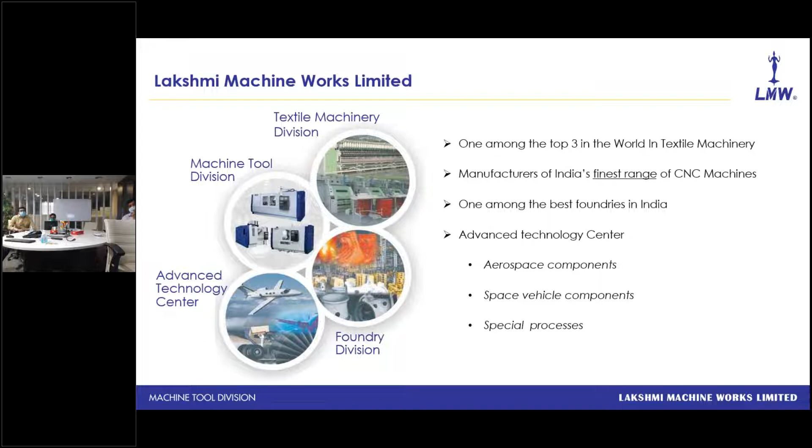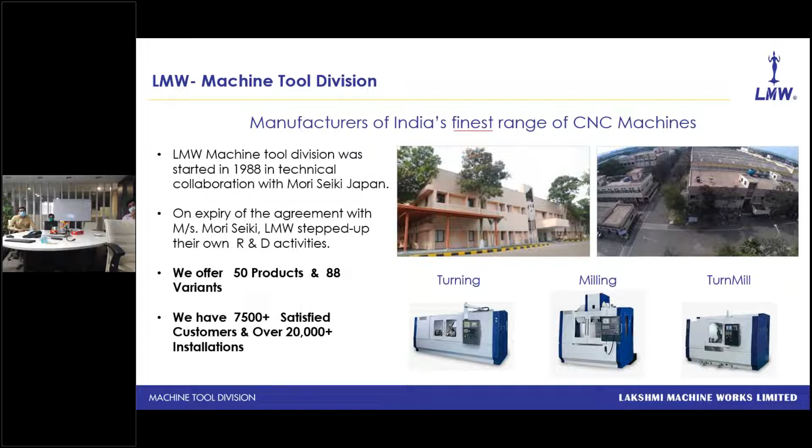We started our machine tool division in 1988 in technical collaboration with Mori Seiki of Japan. The entire plant was set up as per their standards. We stepped up our own R&D activities after expiry of the agreement, and now we offer a wide range of 50 products with 88 variants to cater to almost every segment of the manufacturing industry. Here you can see over 20,000 machines are running day and night at 7,500 plus customers across the country.

We are trusted by the best in the world, DMG Mori. They selected us to manufacture their highly popular model, CMX 600 V1, and since October 2019, CMX 600 V1 is manufactured by us at our factory in Coimbatore.

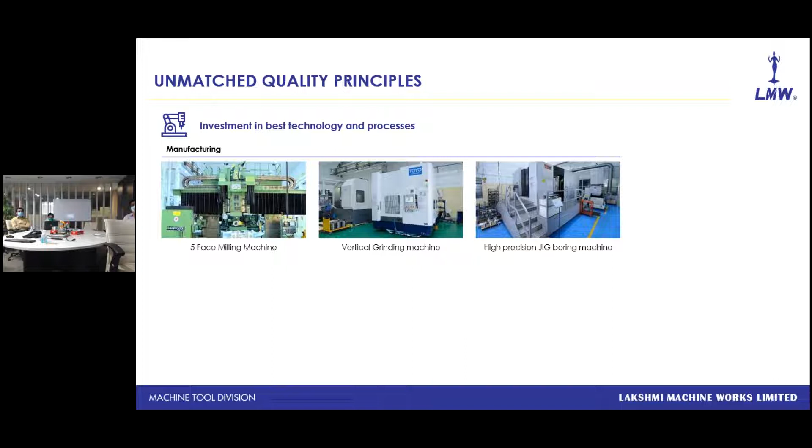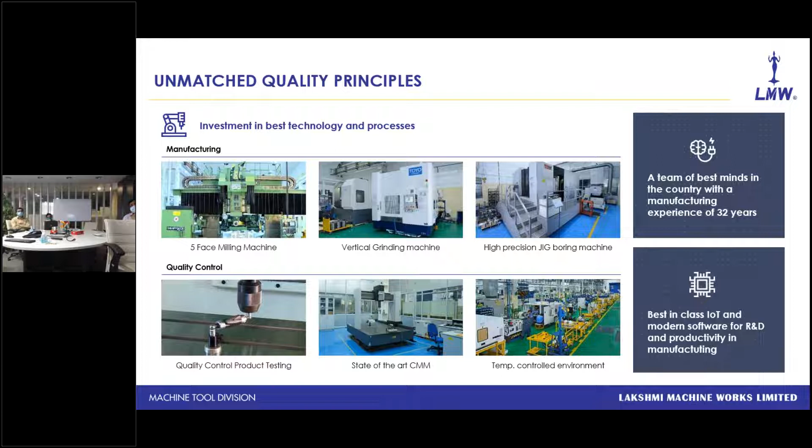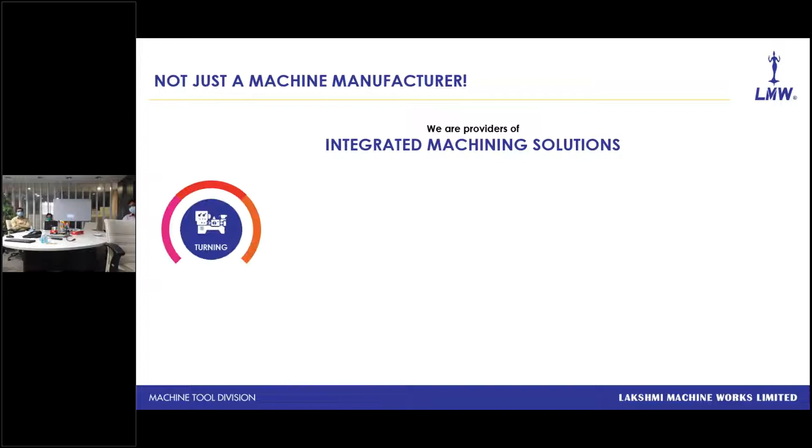We are not just machine tool builders, but complete solution providers. We offer 3 categories of machines: turning machines, milling machines, and turn mill centers with customized tooled-up solutions. We have a highly experienced team in application engineering who has developed thousands of tooled-up solutions.

We also supply machines with complete automation, with robos as well as with gantries to suit your manufacturing setup. And we provide turnkey solutions wherein we conduct CPCP case studies at your work, establish the process and cost per piece. This is supported by our CAD/CAM facilities in our R&D and application engineering.

We also offer IoT solutions in line with current trends in manufacturing. We have digitalized our service department for immediate response to any of your needs on the machine, and thus we are here to provide you the total solution.

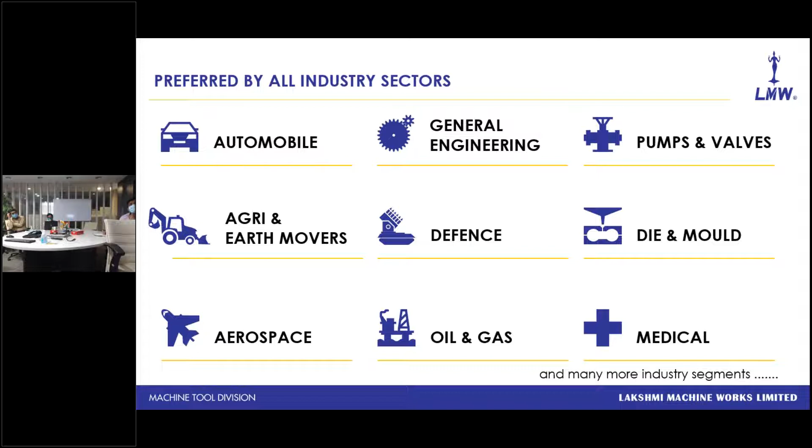We cater to almost every sector, be it automobiles, pumps and valves, aerospace, medical. But apart from this, premier educational institutes like IITs have also chosen our machines to train the sharpest minds in this country.

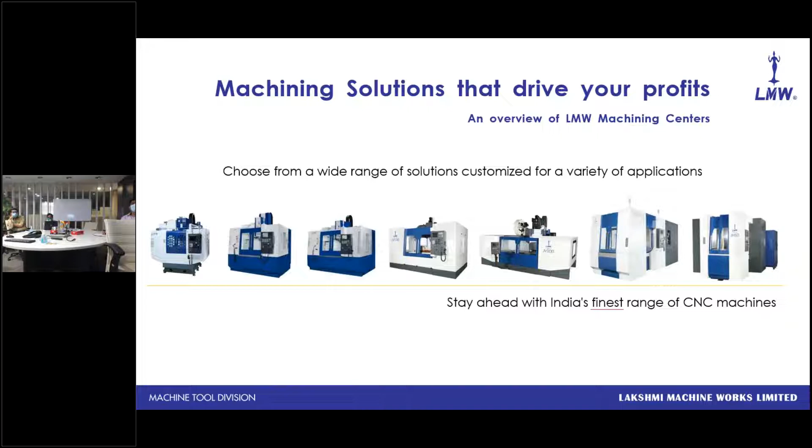We offer the finest and wide range of machining centers with customized solutions to cater to your every requirement and to put you ahead of the competition.

In this slide, you can see various dies and molds made on our VMCs. You can see the shoe mold, the bottle mold, and see the last one, that is a die made for the ornament industries.

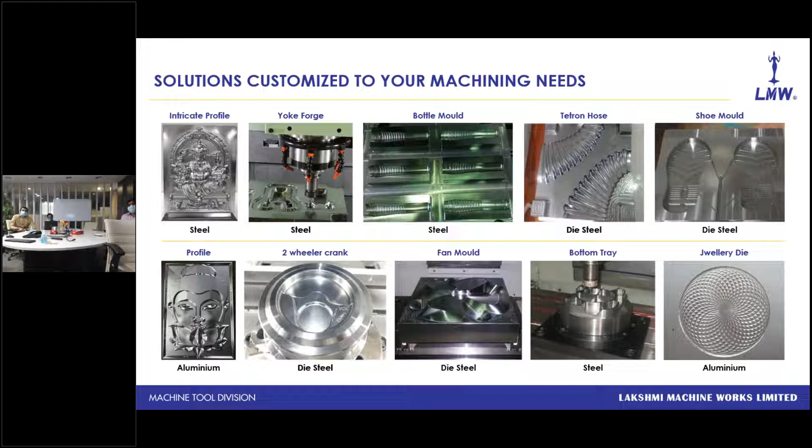You can see the intricacies of profile machining, and all these components are made on our standard VMCs. Here are a few more tooled-up solutions on this slide.

Our CNC lathes are known for their high accuracy, high repeatability, and trouble-free turrets. And we do complete machining of our turrets on our JV100.

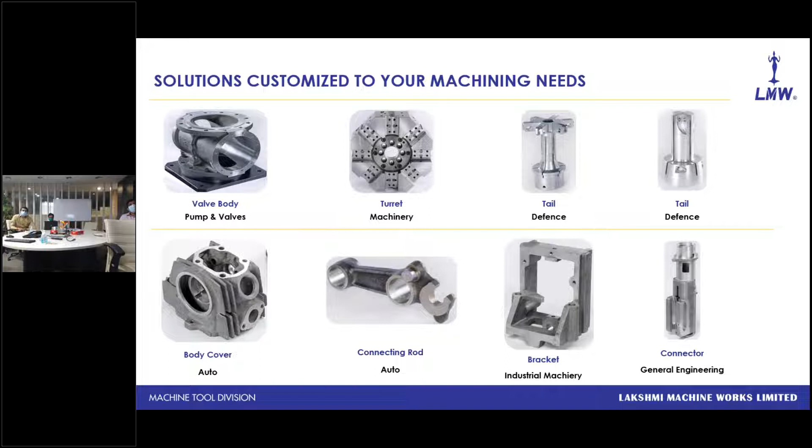See, we all are in business to make money. Now, in order to grow in any business, we need to make decent profits year on year. Now, how to make profit year on year when the costs are going up? Of course, by increasing the productivity.

Now, to achieve higher productivity on machining centers, we should aim for higher surface finish, higher precision, that is nothing but high accuracy, high uptime, and high MRR, that is the material removal rate. So these are the parameters which decide the productivity or ROI of any machine.

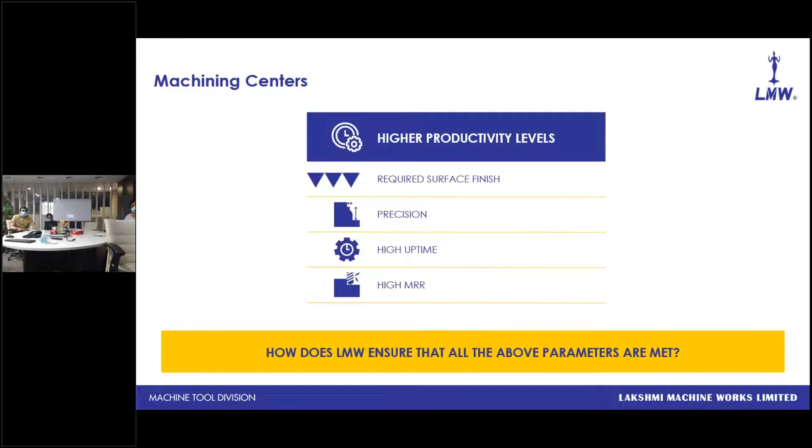And now the next few slides will show you how LMW ensures all these parameters are met on our machining centers. So we will start with the surface finish.

So what are the factors which decide the surface finish? First is the machine itself. Now, when we say machine, it is the rigidity of the machine which decides the surface finish. Second is the spindle. Now, this is the most important part of the machines, and we will be discussing it in much detail in later slides.

Rigidity plays a major role in achieving the surface finish, and it can be classified into two categories, both equally important: static and dynamic.

Now, static rigidity is nothing but the machine structure or castings like bed, saddle, table on which we assemble all other parts. Castings on our machines are of FG300 grade. Now, castings of this grade have properties like high vibration dampening, high tensile strength, and high corrosion and heat resistance.

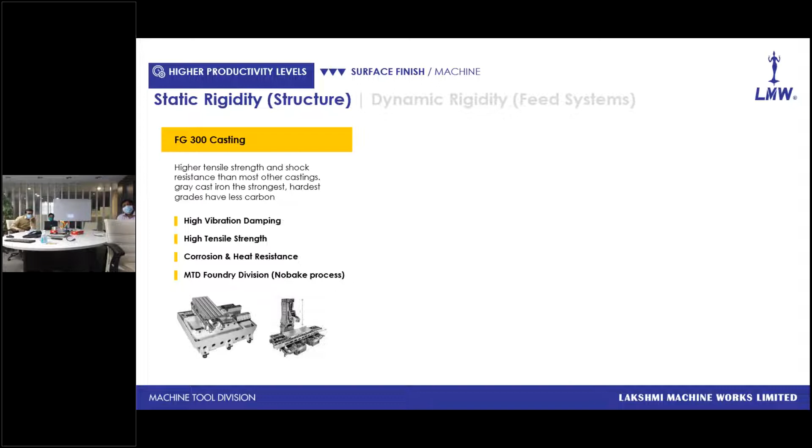All these castings are sourced from our own foundry division. Hence, we have complete control over the process. So you are assured of the best casting quality on our machines.

Our every model undergoes finite element analysis, or FEA. This is an advanced software which analyzes the machine structure and stability at the design stage itself. It simulates the dynamic condition and predicts stress accumulation or casting failure, and accordingly we can add or remove material or provide extra ribbing wherever required. With this software, we can predict the exact behavior of the machine at the design stage.

It is a very wrong perception that only the weight of the machine decides the rigidity. In fact, the casting quality and use of modern software like FEA decide the machine rigidity and its performance.

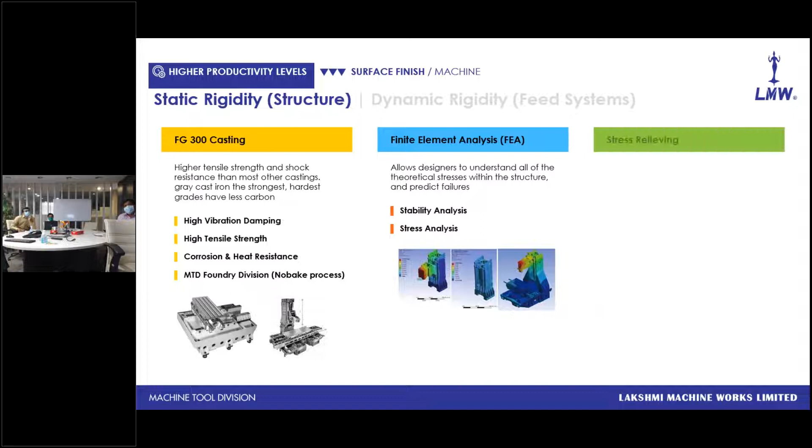Stress relieving also plays a major role in machine rigidity. We all know the natural seasoning process where castings were kept outside exposed to sun for months, but this is an old process. We have modern ovens where we simulate and accelerate the process of stress relieving and achieve the same results in a short period of time. With all this, what we achieve is high rigidity and high machine life.

Next comes the dynamic rigidity. It is the rigidity of various elements in motion, that is, the axis system consisting of ball screws and LM guides.

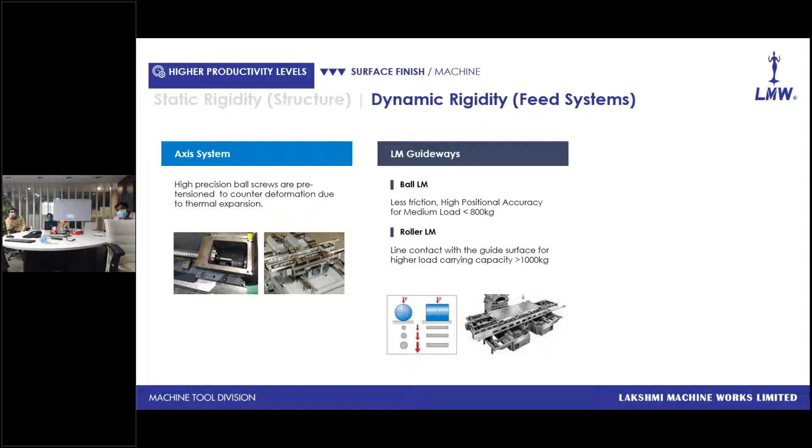We offer you the best class of ball screws. These are pre-tensioned during the assembly to counter any deformation due to thermal expansion. We offer both LM ball as well as LM roller guideways depending on your application. Ball type guideways are suitable up to 800 kgs, whereas LM roller guideways have high load carrying capacity, and that's why they are used in bigger machines where load carrying capacity is over 1 ton.

Spindle plays a major role in achieving the surface finish and productivity, and we'll go in detail in the next few slides. We offer you 3 types of spindles depending on the application.

First is the belt-driven spindle. Belt-driven spindles are used when the material removal is high and the spindle RPM required is less than 8,000. There is a set of pulleys, and the pulley ratio magnifies the torque on the spindle, which is a must for bigger diameter cutters for high material removal at lower RPMs.

Then we have the direct driven spindle. Here the spindle motor is directly coupled with the spindle. You get high RPMs up to 12,000 in this combination, but the torque available on the spindle is less than the belt-driven spindle.

In case your application calls for higher RPM, say 12,000 and above, we offer you the integral spindle. Here the spindle and motor are one unit. The spindle shaft is the rotor and the casing is the stator. Spindle runouts are very less in this case, so you get much higher accuracies and surface finish on the component.

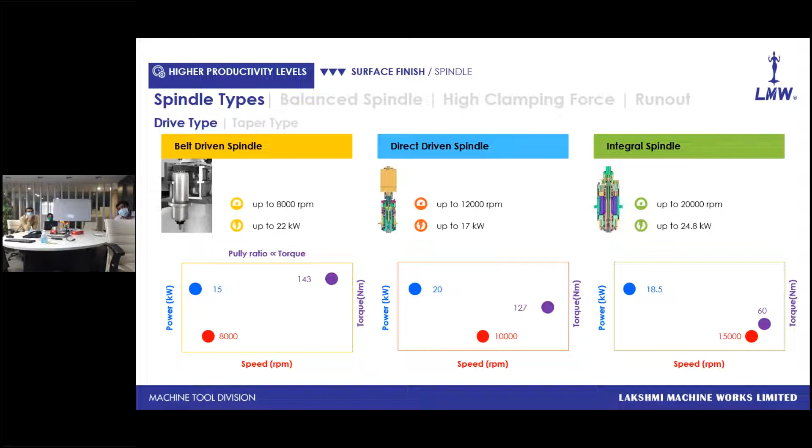We offer 3 types of spindle tapers or tool locking mechanisms. The most common is the BT standard. You must be having BT 40, 30, 50 holders with you. Here the tool holder gets clamped against the spindle taper. We offer this type of clamping system when your application needs less than 8,000 RPM.

As the spindle RPM increases above 10,000, centrifugal forces acting on these tool holders also increase. Hence, the tool locking mechanism needs to be strengthened. In such case, we offer the BBT type spindle. Here the holder gets clamped on the taper as well as on the face, and that makes the locking rigid and ideal at higher RPM, so you're able to achieve higher surface finish and better runout.

Now, in case your application calls for RPM of 18,000 and above, we offer you the HSK type spindle. Here again the tool holder is clamped on the taper as well as on the face, but the clamping is from inside out. So at higher RPM, centrifugal forces actually assist in perfect locking of the holder. This type of spindle is offered when you require very high RPMs, high accuracies, and surface finish.

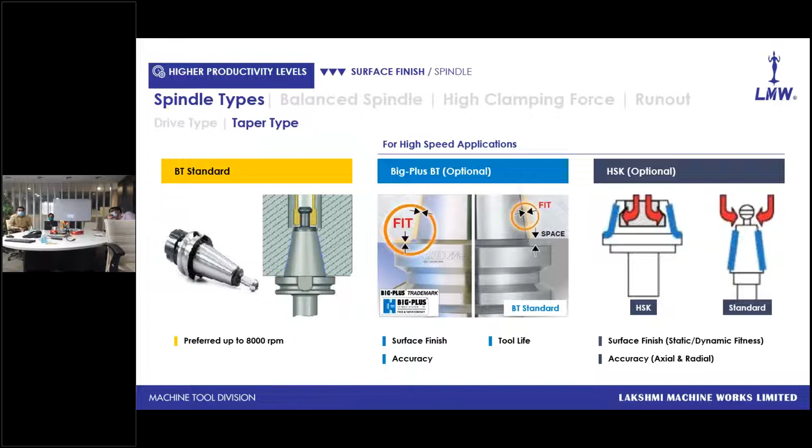Now, the next requirement for getting surface finish is the balanced spindle. You will all agree that balancing of any rotating part is a must for trouble-free performance and life. It is applicable right from your car wheels to the machine spindle.

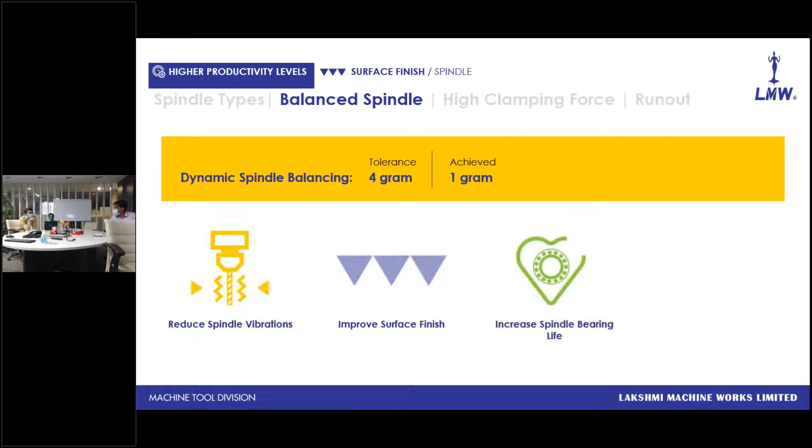As per the JIS, that is the Japanese standard which we follow, the tolerance for spindle balancing is 4 grams. We take extra care and maintain it within 1/4 of that value, that is 1 gram. So what you get in return: reduced spindle vibrations, improved surface finish on components, high spindle life, high tool life, and ultimately high productivity on our machining centers.

Tool clamping force is also one of the major factors which decides the surface finish. For BT40 spindles, ideally it should be between 8 to 9 kilonewton. We maintain it exactly at the mean value of 8.5 kilonewton.

Generally tool clamping force is measured in the static condition. But when the spindle is running at higher RPMs, net clamping force gets reduced because of the centrifugal forces. So how can we ensure that 8.5 kilonewton of net clamping force is available during cutting? That's the reason we measure tool clamping force in dynamic condition with a very special instrument, just to ensure that 8.5 kilonewton of clamping force is always available during cutting conditions.

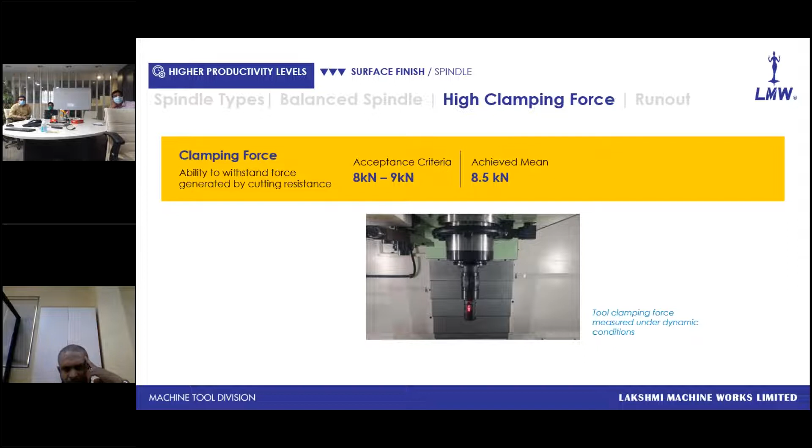Then comes the spindle runout. This is another important factor which decides the component accuracy and the surface finish. As per the JIS standard, allowable runout near the spindle face is 6 microns, and at 300 mm away from the spindle it is 20 microns. What we achieve on our spindle is much less: it is 2 microns and 6 microns.

So how does this runout affect your productivity? Suppose you have a 10 mm diameter in the spindle. Due to the runout, the apparent diameter would be say 10.05. So naturally you will not be able to maintain the bore diameter, achieve CP/CPK, or you might even get rejection.

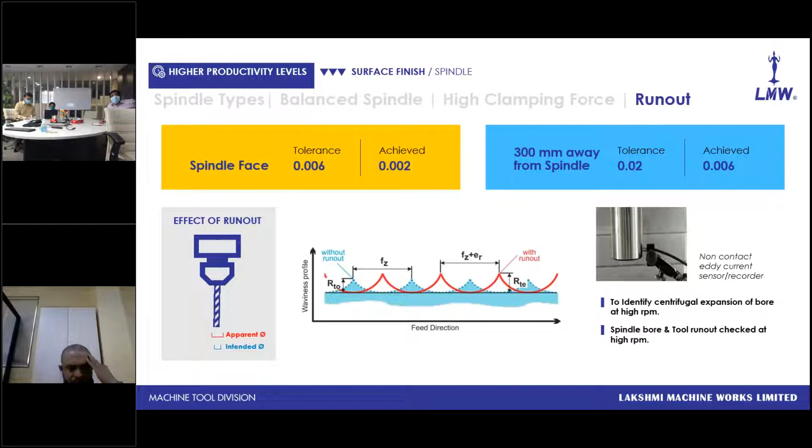Now spindle runout is generally checked in static condition using a mandrel and micron dial. Many of you might have checked with the same method. But with this method, how can you predict the runout at higher RPMs when the centrifugal forces also come into picture? That's the reason we check the spindle runout in dynamic condition using non-contact eddy current sensors. With this, we can predict the spindle behavior at higher RPMs and the accuracies that can be achieved during cutting conditions.

All these previous slides must have assured you that we are taking utmost care in manufacturing and testing of our spindle, so that you get a high accuracy and productivity on our machining centers.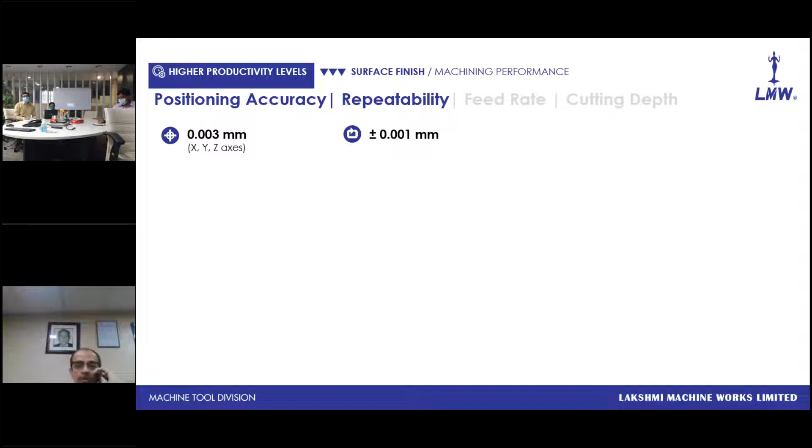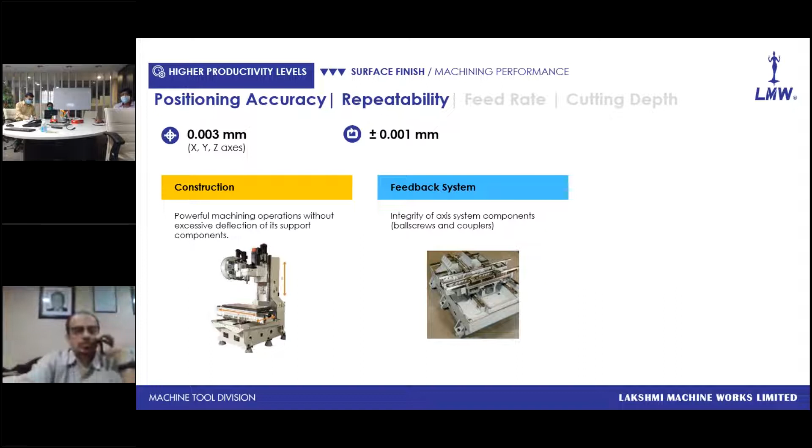How do our machines deliver such high accuracies? Because of the casting quality, manufacturing process, overall construction, and rigidity of the axis systems. Even though we use high-class ball screws, they also have some manufacturing errors in microns. That's the reason we carry out laser calibration of each and every machine, where the pitch error and backlash are compensated in the system. That's how we achieve repeatability of plus minus 1 micron on our machines.

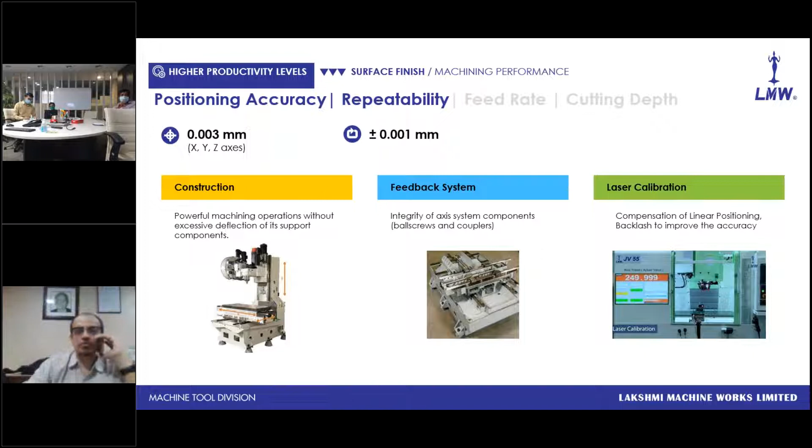Once we start getting vibration or chatter marks on the component, it not only affects the surface finish but also affects the tool life, and we are forced to compromise on speeds, and ultimately the productivity of the machine suffers badly. We have addressed this issue. LMW machines have a rigid structure, thus the vibration levels are minimum, and the high stiffness in the feed mechanism ensures that dynamic loads do not affect the machine and the movements are smooth. As a result, you get a high surface finish, high tool life, and ultimately high productivity.

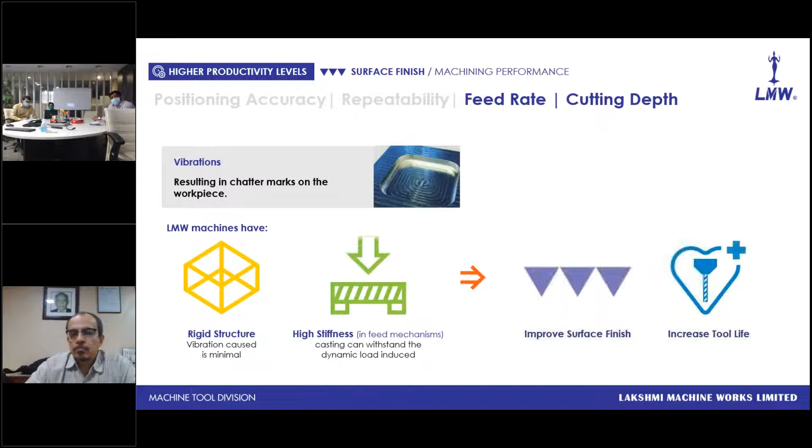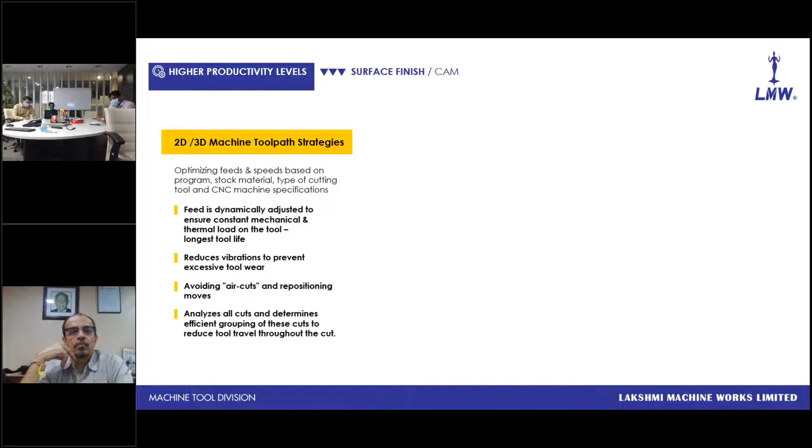Now, the next important requirement to achieve high surface finish, especially while machining dies and molds, is the latest CAM software. These latest CAM softwares create an optimum tool path and adjust the feed dynamically to ensure constant load on the tool, to reduce vibration and achieve better tool life.

They are also capable of simulating the part program before transferring it to the machine, so that you can check and correct it in time to avoid costly damage to component and tool. CAM software nowadays is a must to achieve high productivity, but at the same time your machine should also be capable of responding to the software's needs.

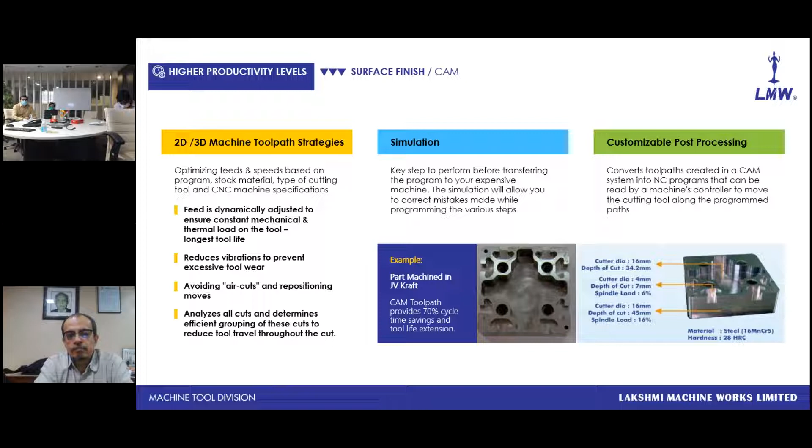We'll show you an example. This aerospace component was machined on our JV Kraft with the latest CAM software, and we could reduce the machining time by 70% compared to the conventional way of programming. Now we'll show you the actual cutting of this component in the next video.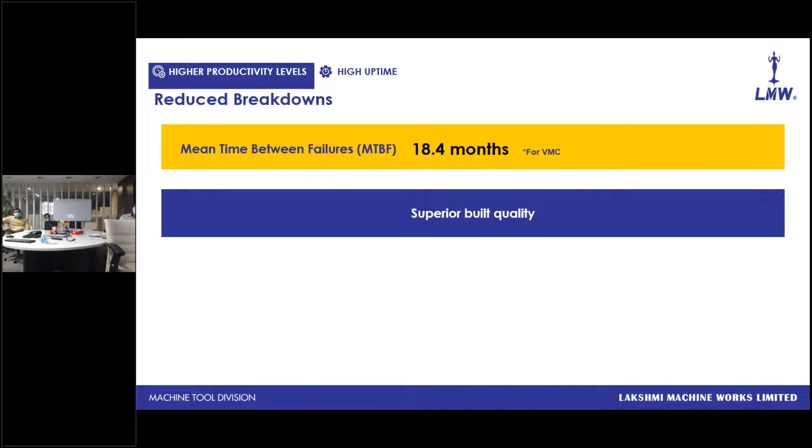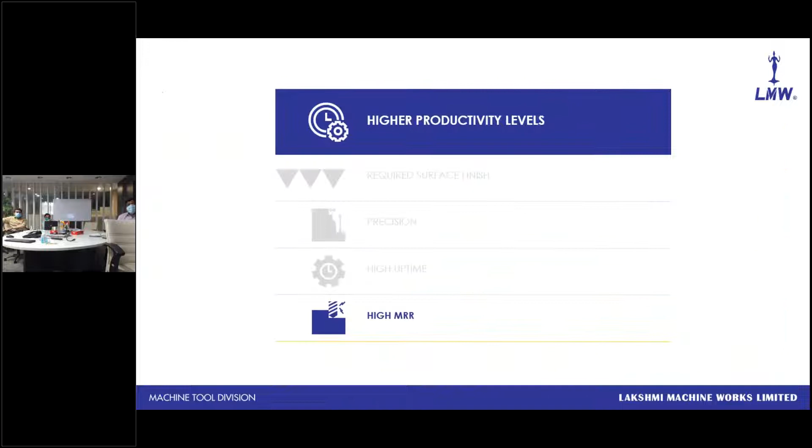We have seen all these contributing factors in detail earlier. So I'll move to the next slide. Now, this is the last factor behind the high productivity: the high MRR, or material removal rate.

Here you can see the typical material removal rates of our VMCs, up to 600 cubic centimeters per minute on JV200. The material is of course steel, and here's the direct drilling capacity.

Most of our models, say JV55, JV Kraft, JV-M60, JV80, are capable of direct drilling of 40 mm, whereas JV200 has a capacity of drilling direct 80 mm hole.

Now we'll show you the cutting capability of one of our popular models, JV55, in the next video.

We offer you the finest and widest range of machining centers. Our VMCs come under the JV series. There are highly efficient and popular models like JV55, JV Kraft, JV80 and JV100. We have supplied these models across all segments, be it auto components, pumps and valves, dies and molds, or defense.

For heavy duty and bigger components, we offer JV130 and JV200. Then for mass production, we have machines with rotary pallet changers to minimize your non-cutting time: JVM60, JV65 and JV105 RAPC.

These are our VMCs with rotary pallet changers, whereas JV55 twin is a twin spindle VMC for machining two identical parts at a time. Then our JU60 is capable of simultaneous interpolation of 5 axes.

This machine has state-of-art features like a 15,000 RPM BBT type built-in motor spindle with all integral sensors for condition monitoring.

Here we have provided cooling for all heat sourcing elements, that is not only the spindle motor, but all axis motors, ball screw nuts and motor flanges for the utmost thermal stability.

Thus, this machine is capable of achieving high profile accuracies, making it ideal for aerospace components. For a high-speed machine, we have offered up to 20,000 RPM spindles on our JV80.

Now these are our HMCs. They come under the JH series. We have 4 models to offer, and among them JHM40 is our moving column HMC.

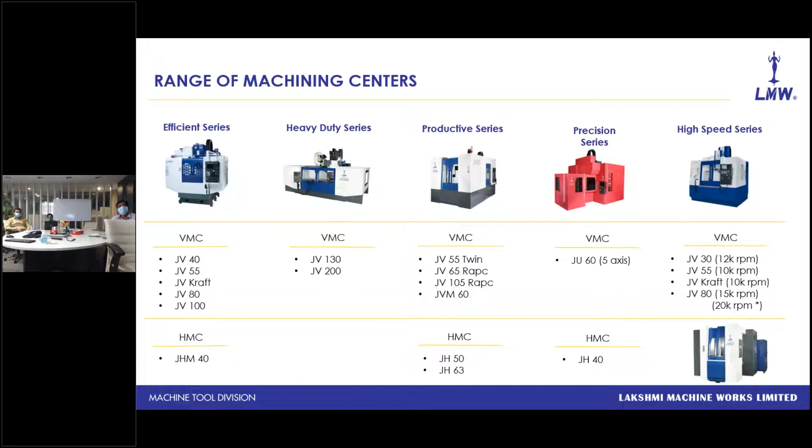We'll quickly go through the specifications of our VMCs and HMCs, starting with JV40 and JV55. These are compact VMCs with the BT40 spindle. JV40 has a table size of 600 by 350 and a spindle power of 5.5, 7.5.

Whereas JV55 has a table size of 900 by 430 and a spindle power of 7.5/11.

Now we'll show you the JV40 in action in the next video.

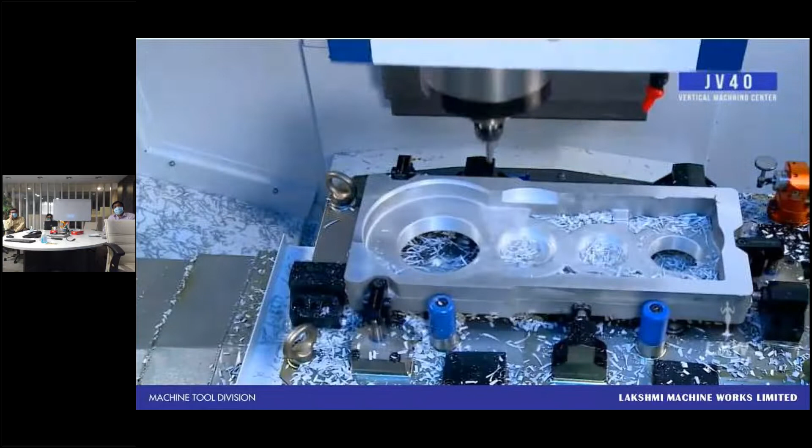JV Kraft and JV80 both have an X-axis stroke of 800 mm. JV Kraft has a Y-axis stroke of 440 and spindle power of 7.5/11, whereas the JV80 has a Y-axis stroke of 540 mm and a spindle power of 11/15 kilowatts.

Load carrying capacity of JV80 is 800 kg. We'll show you the JV80 in action in this video.

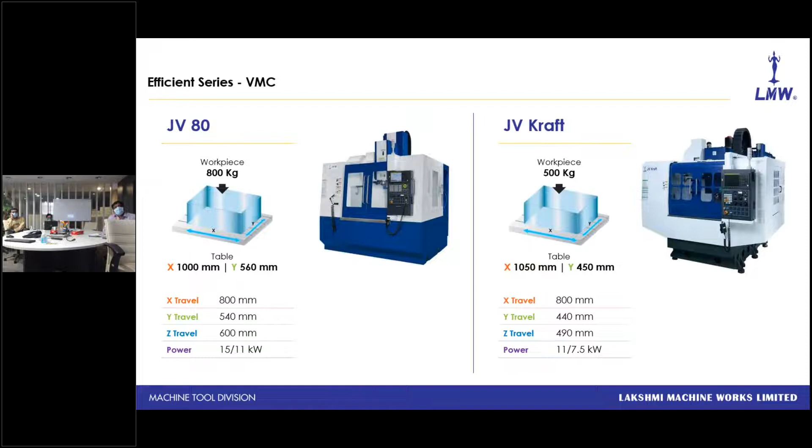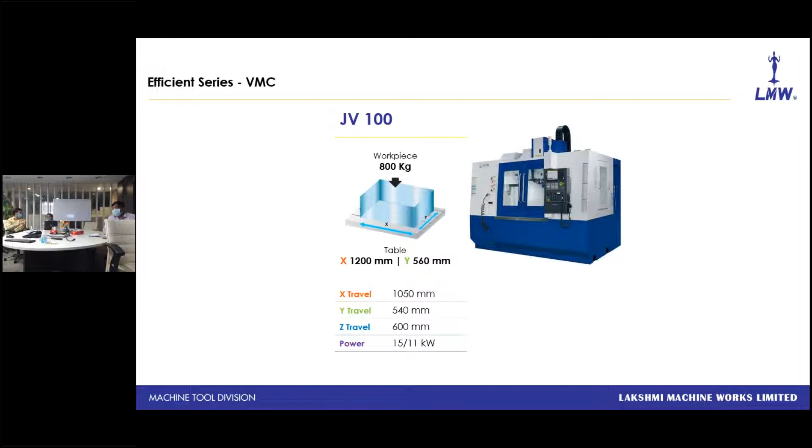Now, our JV100 has an X-axis stroke of 1050 and a table size of 1200 by 560. JHM40 is our HMC with a pallet size of 400 by 400. It's a moving column HMC.

So the component and the pallet remain stationary. Hence machine dynamics remain constant because your component is stationary, and that's the reason you achieve better accuracies. We'll show you this JHM40 in the next video.

JV130 and JV200 are our heavy duty machines. Now see the load carrying capacity of both the models.

And to support that load, the Y-axis on JV130 has 3 rows of LM roller guideways, whereas JV200 has 4 rows of LM roller guideways on the Y-axis and a hardened and ground guideway on the Z-axis.

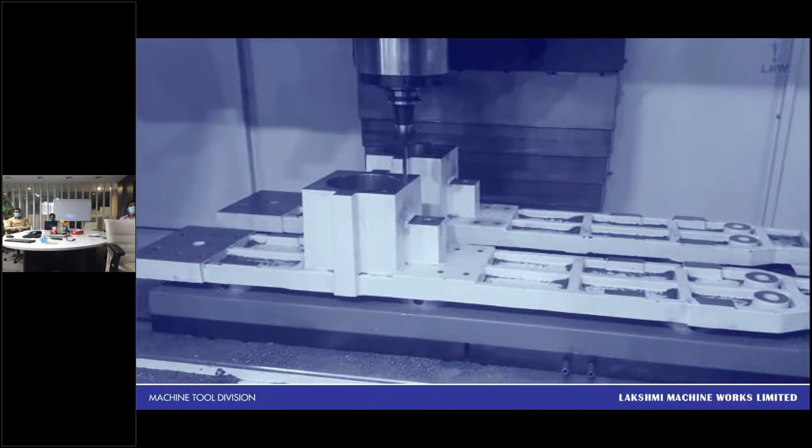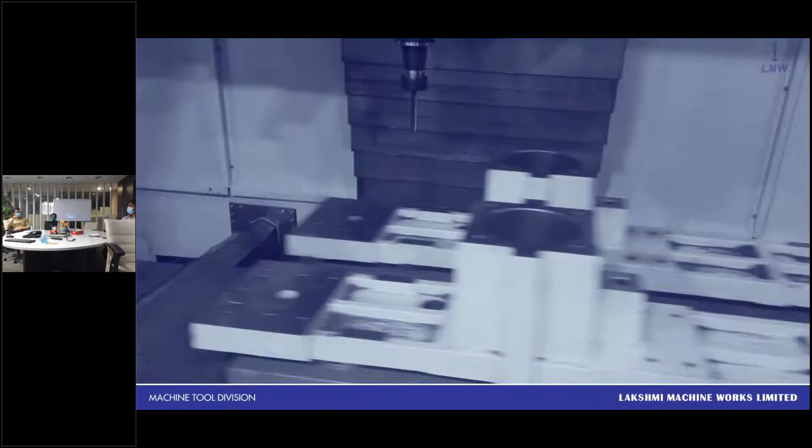So for better productivity, we have twin spindle VMC JV55 twin to machine 2 identical components at a time. And to minimize your non-cut time, we offer VMC with a rotary pallet changer.

Here JVM60 is our moving column VMC with a rotary pallet changer. Here again, the component is stationary, and that's the reason you achieve better positioning accuracies.

We'll show you the JV twin in action in this next video.

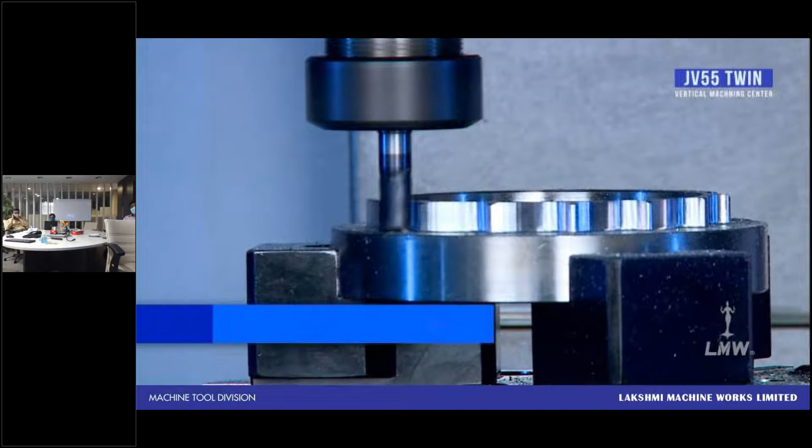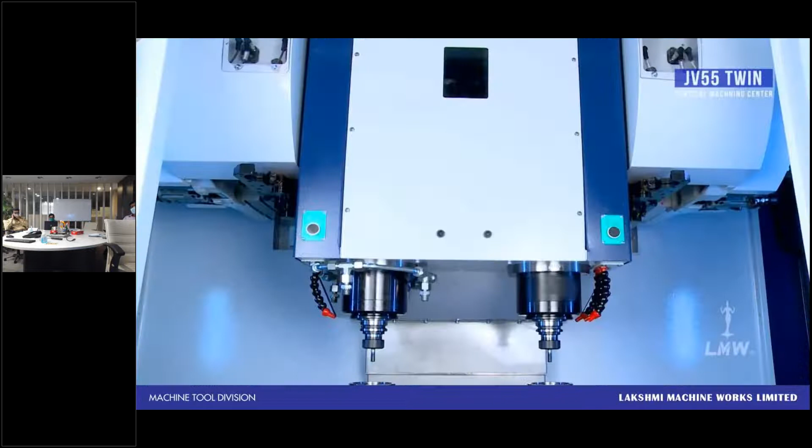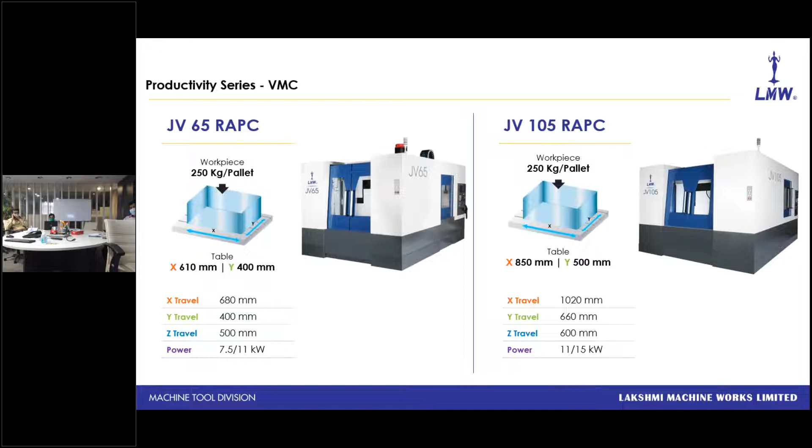We have 2 more models with rotary pallet changers, that is JV65 and JV105 RAPC. JV105 RAPC is a bigger pallet machine with Y-axis stroke of 660 mm.

For high-speed machining, we have JV30. This is our drill tap center with a BT30 10,000 RPM spindle and 21 tool ATC.

Whereas we have supplied a 20,000 RPM spindle on JV30. We'll show you this JV30 in action in the next video.

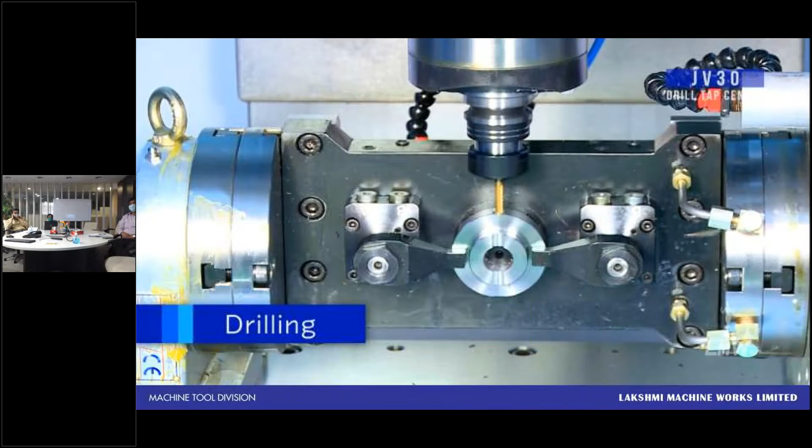JH50 and JH63 are our HMCs. JH50 has a table size of 500 by 500. It is a single pallet compact HMC, whereas JH63 is our biggest HMC with a pallet size of 630 by 800.

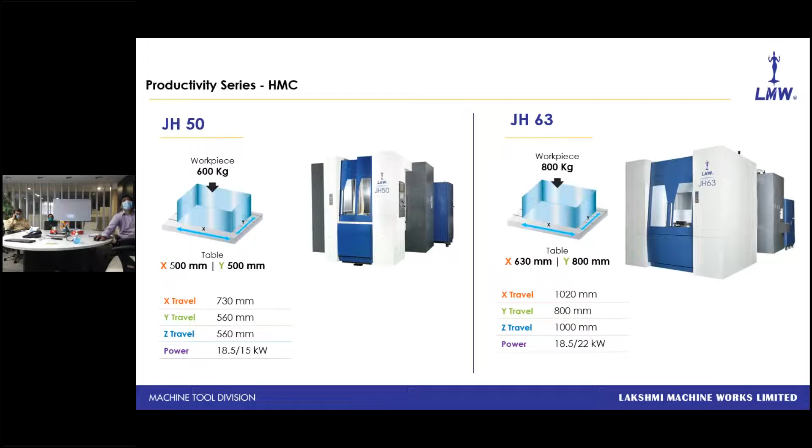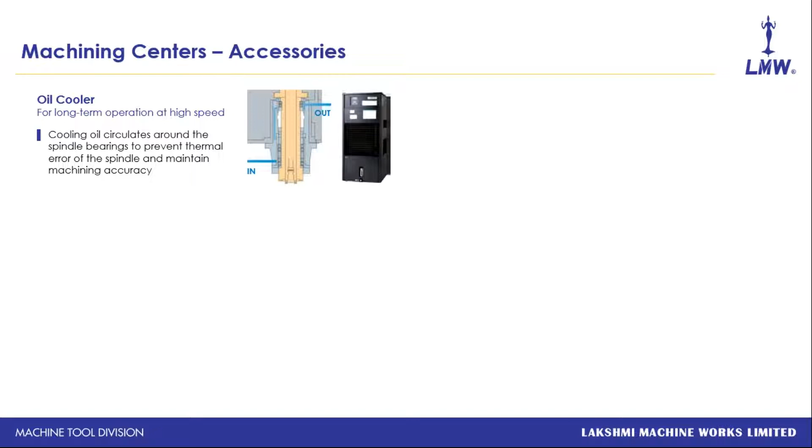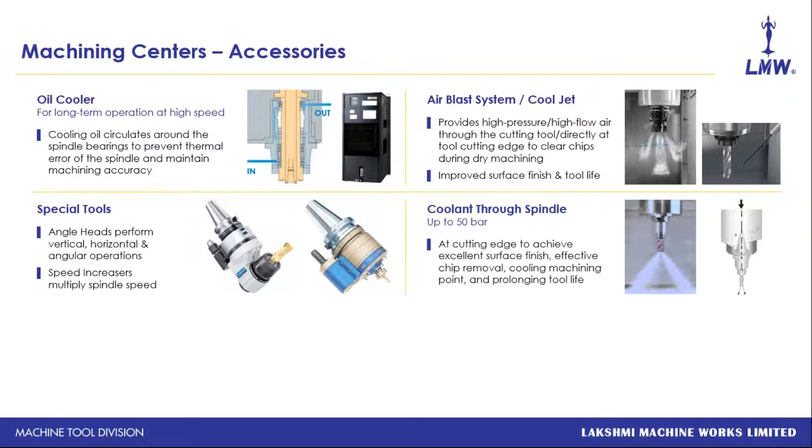We offer these accessories as an option on our machining centers: spindle oil cooler, especially for high RPM spindles; air blast through spindle for dry machining; special tool holders like angular heads and speed multipliers; coolant through spindle up to 50 bar; compact and space saving inline filtration systems; and a mechanical or hydraulic counterbalance to ensure zero drop of vertical axis.

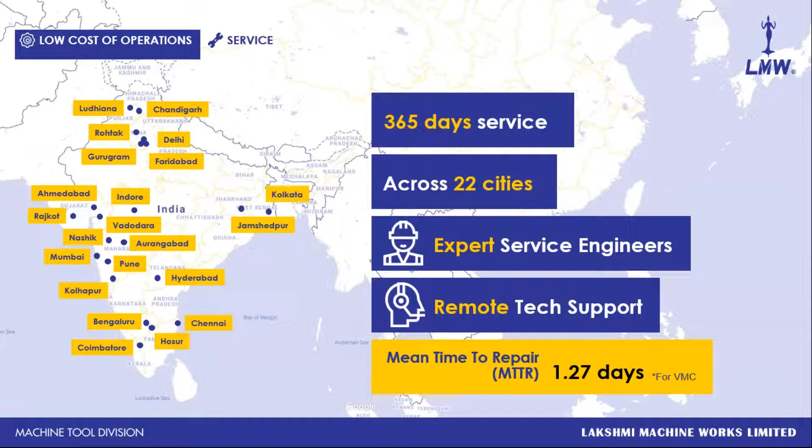Now regarding our service support, we have a very strong and highly experienced team of service engineers strategically placed at 22 major industrial cities. We also have a call center well equipped to provide remote tech support. As per our data, MTTR, that is the mean time to repair our VMCs within these cities, is 1.27 days. So with all this, we ensure your cost of investment on our machines remains optimal.

We have a tie-up with Siemens Financial Services, and you can avail their various financial schemes.

There is a question regarding the battery. If your machine is running continuously 2 shifts, at least 16 hours a day, and you are switching off for 8 hours a day, your battery may last 1 year. But if you are continuously running 24/7, there will not be battery replacement in a year - it will definitely come to a minimum of 3 years. It depends on how many hours in a day or month you are switching off the machine. The battery life comes into the picture whenever you switch off the machine. Normally, for 16-hour operation with 8 hours off, 1 year will be a normal battery life.

Which rotary table and angular head do you use for your VMC? Krishna Prasad, thank you. For the rotary table, you can use Kitagawa etc. - there are a lot of suppliers for that. For the angular head, normally we use BIG Daishowa, a Japanese make, and also Alberti. There are a lot of suppliers in angular head also.

One more question: which power spindle is used for cast iron and mild steel machining? Normally, a power spindle with 7.5/11 power is sufficient. It depends upon what depth of cut you are using. For a normal depth of cut around 3.5 mm, 7.5/11 is sufficient. Regarding the spindle types, even a belt drive spindle is sufficient for that.